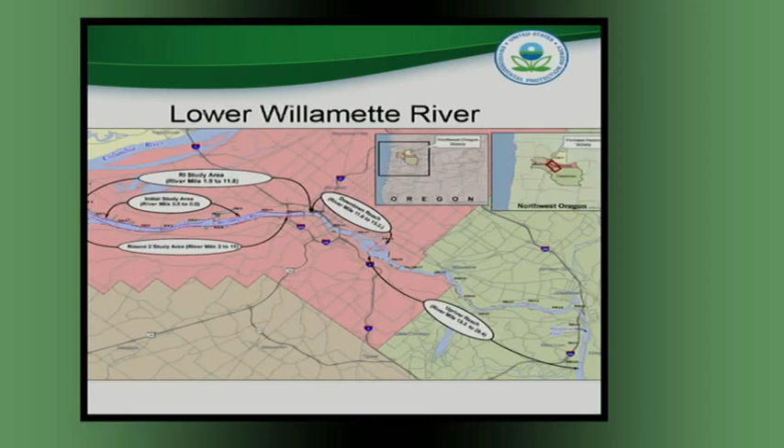Since 2000, EPA has worked with the Oregon Department of Environmental Quality, 6 federally recognized tribes, 3 natural resource trustees, and the Lower Willamette Group, a group of 10 potentially responsible parties for the cleanup. We have done extensive studies of the amount of contamination in the Willamette, how people and the ecosystem could be harmed by the contamination, and options for cleaning up the contamination. We have sought public input throughout this process.

This map up here shows the lower reach of the Willamette River. It is about 26 miles long. The confluence is at the Columbia. When we first listed the site, it was listed from river mile 3.5 to 9.2. As we progressed through the studies, the site has grown from river mile 1.9 to 11.8.

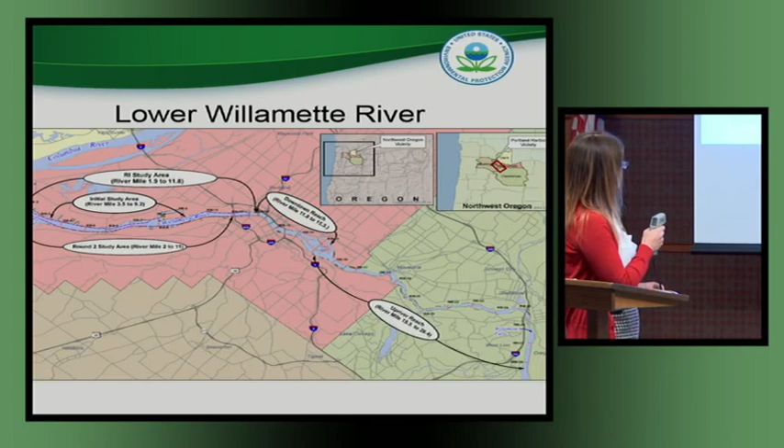Up above the site is called the downtown reach. That's river mile 11.8 to 15.3. This is an area where there are contamination and sources, and Oregon Department of Environmental Quality is working on cleaning up that reach of the river. Above that is what we call the upriver reach, and this is where we have collected background or reference data for the site, since it is an area that is not impacted by contamination from the site.

So this cleanup proposal is one part of a three-part process. We have already started cleaning up some of the most contaminated areas within Portland Harbor. We call them early action areas. Some of the areas that have been cleaned up include Gasco, Terminal 4, and the state did an oversight cleanup of Arco BP. We also have a Superfund site within our site, which is McCormick and Baxter, and that has a final remedy.

Source control is an important aspect of the cleanup to reduce risk and prevent recontamination. Oregon Department of Environmental Quality has been in charge of a comprehensive source control program. A plan that discusses the status of source control can be found on DEQ's website. I'm here to talk about the third part, cleanup of the contamination in the river. Cleanup of contaminated sediment in riverbanks, along with controlling sources of contamination, will indirectly address contamination in other media, such as surface water, pore water, and biota.

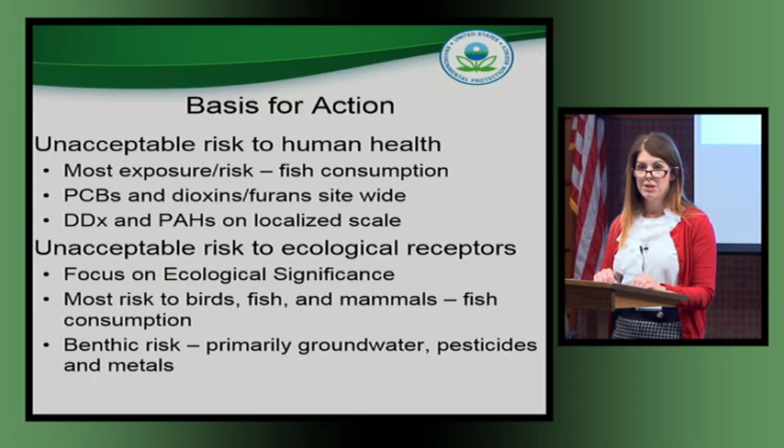The goal of Superfund is to clean up contaminant concentrations to reduce risk to acceptable levels. This does not mean cleaning up all the contamination released into the environment. There are 64 contaminants of concern at this site. Some of the contaminants are unique to certain media. Media includes sediment in riverbanks, biota, surface water, and pore water or groundwater.

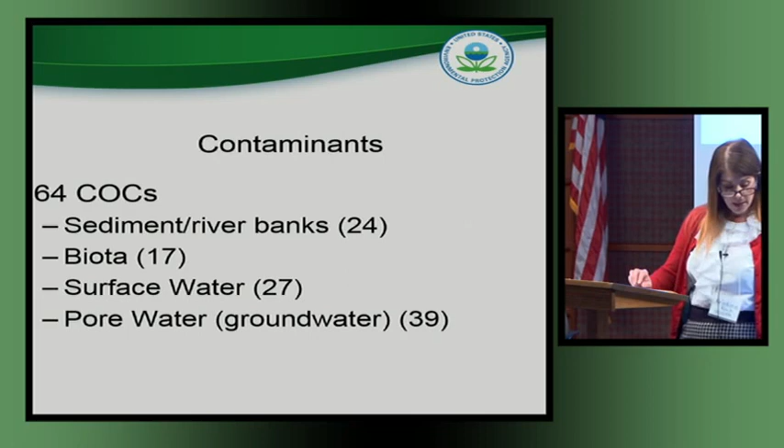Some of these contaminants, however, are found in all of the media. Not all of the contaminants are co-located. Some are found in one part of the site and others found in another part of the site. They were released from different sources, and where we see high concentrations of contamination in the sediment, we also find high concentrations in other media. So again, we're going to be talking about the 24 contaminants that are found in sediment and riverbanks.

So it's difficult to develop and design cleanup options when you have 64 contaminants. So in order to simplify this approach, what we've done is determined some focus COCs that we can use that address all the contaminants. So we're still going to clean up all the contaminants, but in order to develop these cleanup options, we focused in on contaminants that had the largest footprint, addressed most of the risk, and were co-located with these other contaminants.

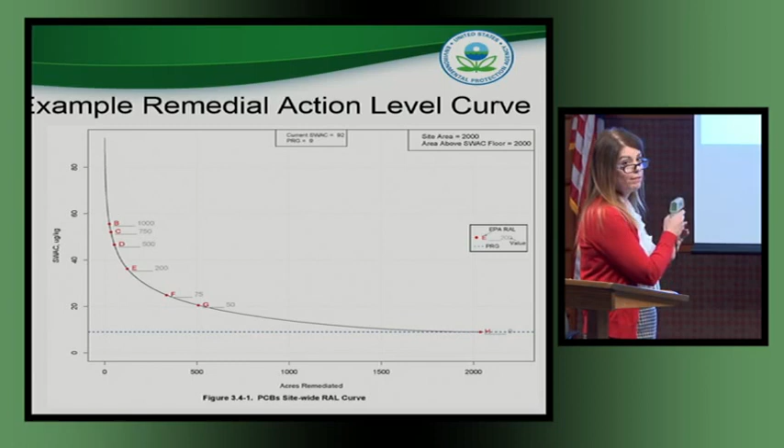So once the focus COCs were identified, we used what's called remedial action curves to determine where to dredge and cap in the river. This is an example of a remedial action curve. It is one of many tools that can be used to develop cleanup areas. A curve was created for each of the focus COCs. This is just one of them for PCBs. So the top of the curve up here shows the current level of contamination in the river. How the curve is created is by removing one sample at a time and replacing it with your PRG. And as you do that, it creates this curve.

So when you look at what contamination do I need to get to, this shows where we start with B. And you can see that very few acres are associated with B, but you get a lot of concentration reduction just by going to that point. And as you move down, the area across here increases with each one, and the concentration in the site drops until you get to about this point, alternative E. So that's where we start to get more area involved with less drop in the concentration. And especially when you get out into this far end of the curve, you'll see you have to do a lot to get a very little difference in the concentration. And alternative H is on the line where the PRG intersects the remedial action curve.

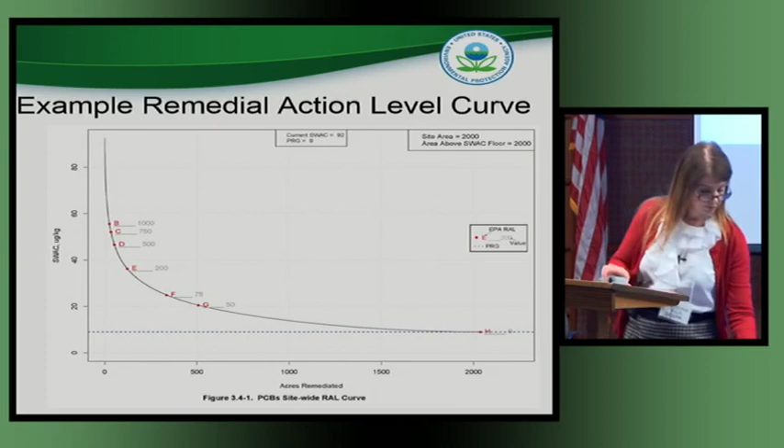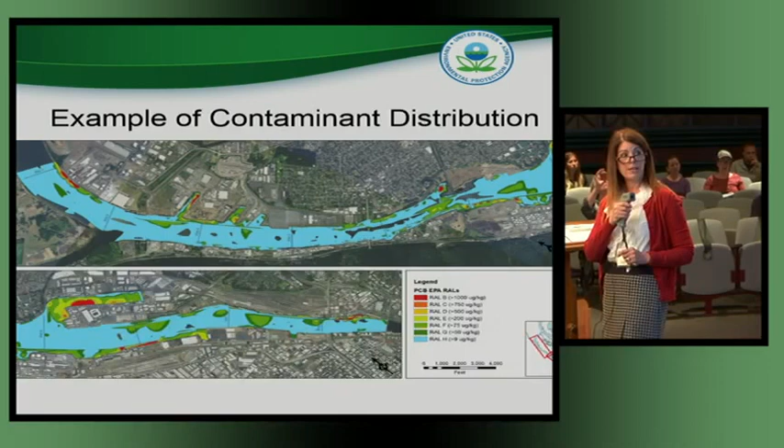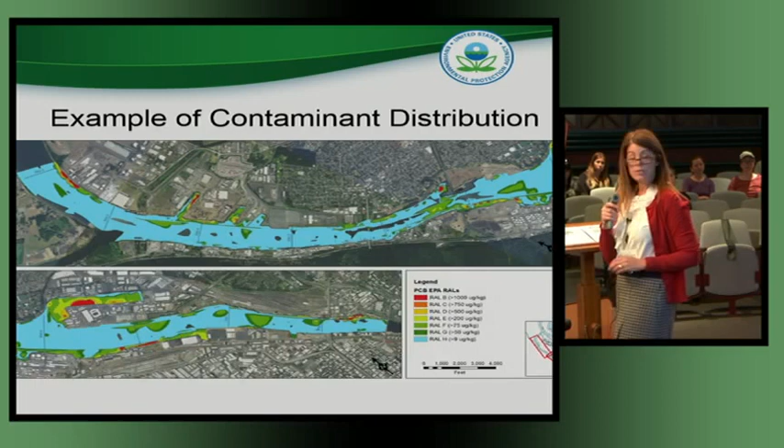Sorry, Christine. That's okay. And this figure shows then how that translates into the map of where it's located in the site. So this shows the B RAL, which is in red, so you can see the red areas of the site. And C would include the red and the orange. So that footprint includes both, and as you go down, you keep including all the ones above it to see how big that footprint is. And then, of course, the H includes pretty much the entire site. There are a few areas where it is not located.

Once an area has been dredged, a layer of sand will be placed over that area to deal with any residual contamination that remains. Options to deal with dredged material after removal include treatment and disposal in either an on-site disposal facility or an off-site disposal facility.

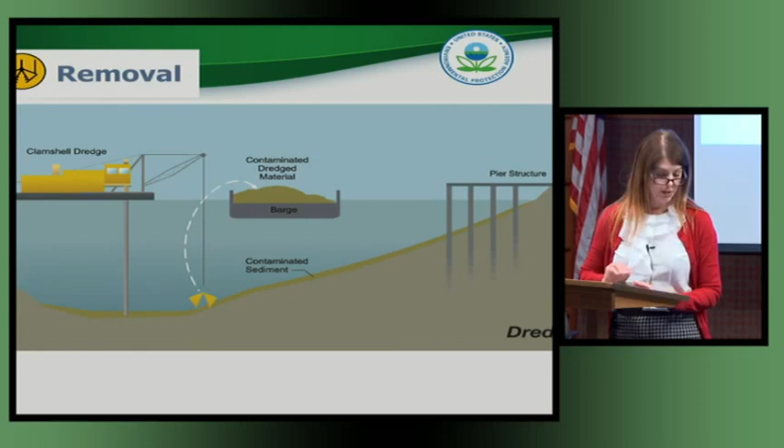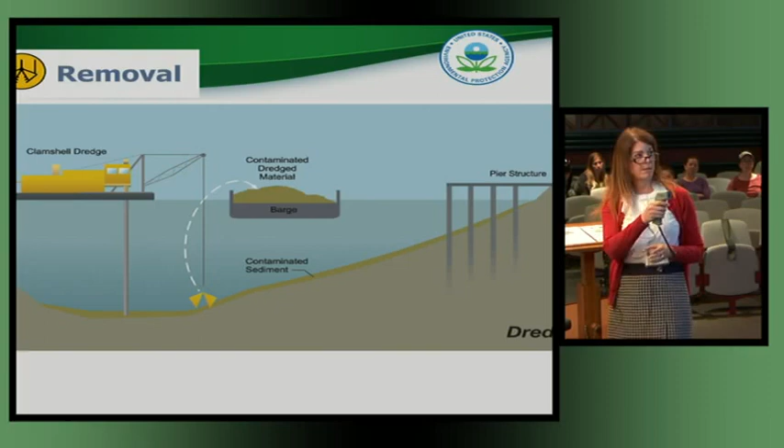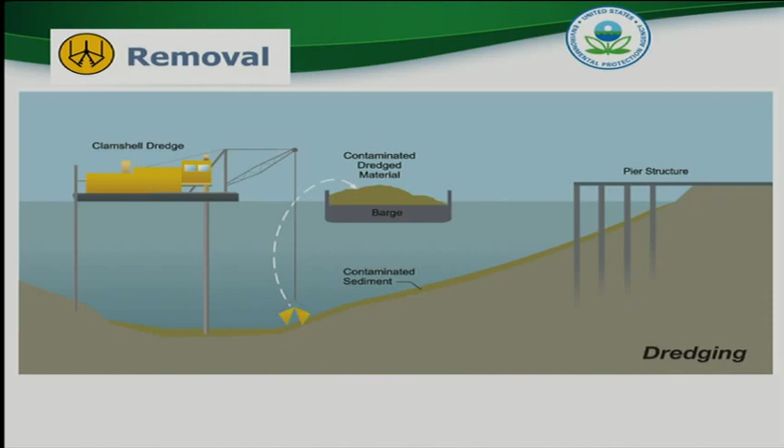So what happens here is that you have a dredge, which is on a barge, and it has a clamshell that comes down, and the clamshell clamps shut over the contaminated sediment, and then it brings it up through the water column and puts it onto a barge. And then from the barge, it is taken to a transloading facility where it's then loaded onto trucks and transported to a landfill.

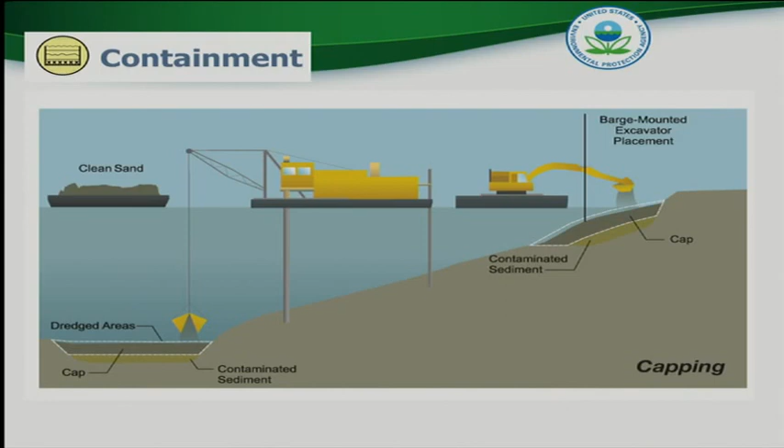Another option for cleanup is called containment or capping, and that's where we cover the contaminated sediment with clean material. This typically includes layers of sand, gravel, and rock designed to contain and isolate the contamination. Where this happens, these areas are then designated as a cap, and we have to maintain those caps as long as the contamination remains in the sediment. So that's pretty much beyond our lifetimes and into the future.

With this one, we enhance natural recovery by putting a thin layer of sand over the contamination and then allow that sand to mix and dilute the sediment contamination in the river. In situ treatment was also used as either a component of capping or enhanced natural recovery, or in the residual management layers after dredging.

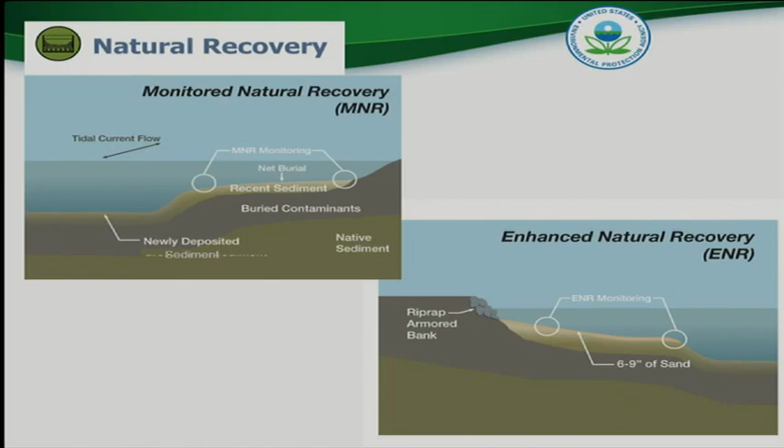So all the alternatives include varying combinations of all these technologies. Some of the things that we thought about in assigning technologies to a particular area include the type, amount, and depth of contamination, the likelihood that people, wildlife, or fish come into contact with the contamination, the potential for natural recovery or scour to occur, the likelihood that it might be disturbed by fish, ships, or construction activities, and the need to maintain water depths and habitats so that people and fish can continue to use the waterway.

Institutional controls are also a part of all the alternatives. They are primarily used to protect humans from exposure to contamination, since birds, fish, and wildlife don't read signs or obey restricted areas. For the whole river, we would have a consumption fish advisory until we meet the cleanup goals. And in capped areas, we would have regulated navigation areas and land use restriction areas to ensure that those caps don't get disturbed and release the contamination back into the environment.

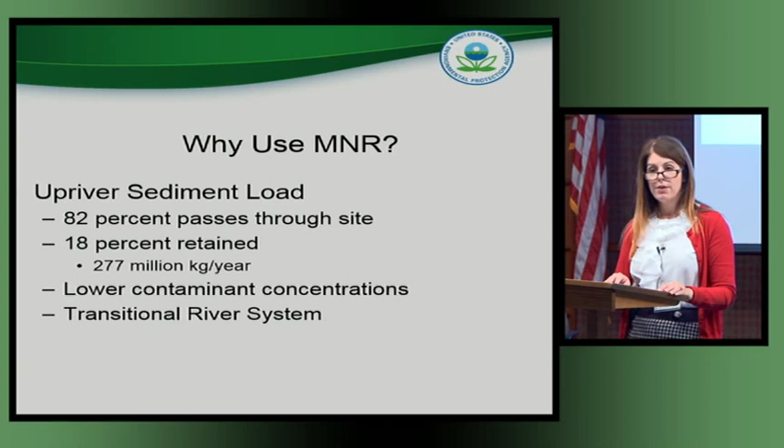So these processes are occurring now, but the data shows that they are not occurring fast enough to let the river processes occur on their own. So some action needs to be taken. So we do have evidence of MNR. We have done bathymetric surveys, multiples of them. We looked at deposition rates based on the difference between these bathymetric surveys.

We also looked at how consistent the deposition and erosion is based on those bathymetric surveys. We've looked at sediment grain size. Where we find fines, we know we have deposition, and where there's coarser material, we know it's more erosional. We look at anthropogenic factors, such as propeller wash, where we know that those activities that humans do will not allow monitored natural recovery to occur.

We also looked at surface to subsurface concentration ratios. This allows us to see where we have more mixing occurring in the upper surface layer than in the subsurface layer. We also looked at where we have wind, wave, and wake actions, because in these nearshore areas, that constant sloshing of the water is going to continue to erode away any sediment that deposits in those areas. So based on these lines of evidence, EPA has concluded that MNR is a viable cleanup technology that can be used, but it can't be used in all areas of the site, especially with higher concentration areas.

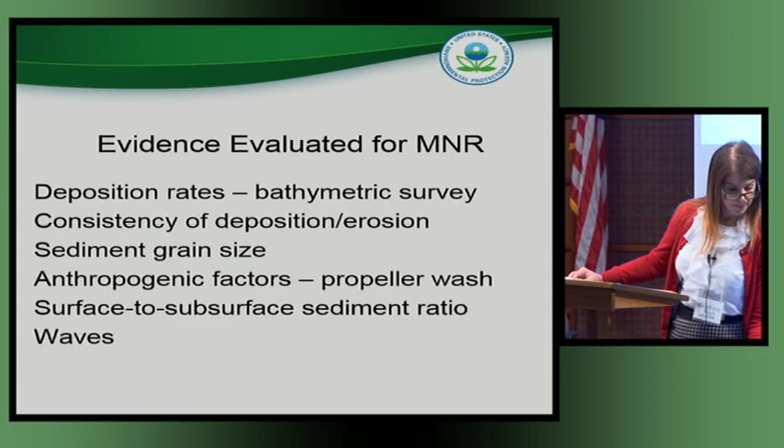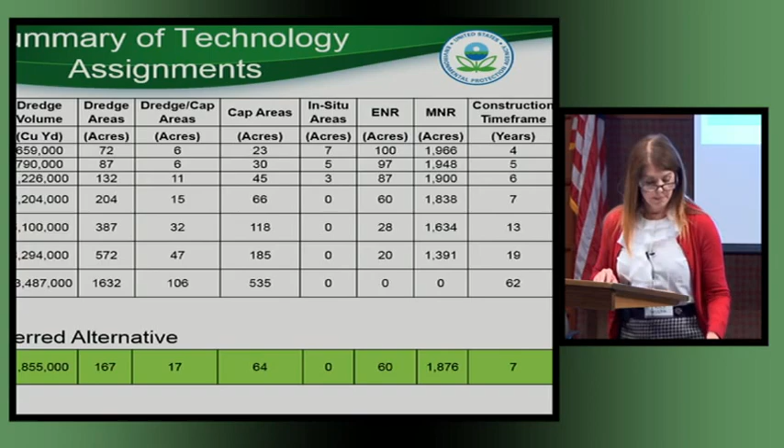So this slide shows a summary of all the alternatives evaluated in the feasibility study. As you can see, with each alternative, the areas of dredging and capping, or just capping, increase as you move through the alternatives. But the areas of pure in-situ treatment, enhanced natural recovery, or monitored natural recovery decrease. Also, the time frame for construction increases and the cost increases.

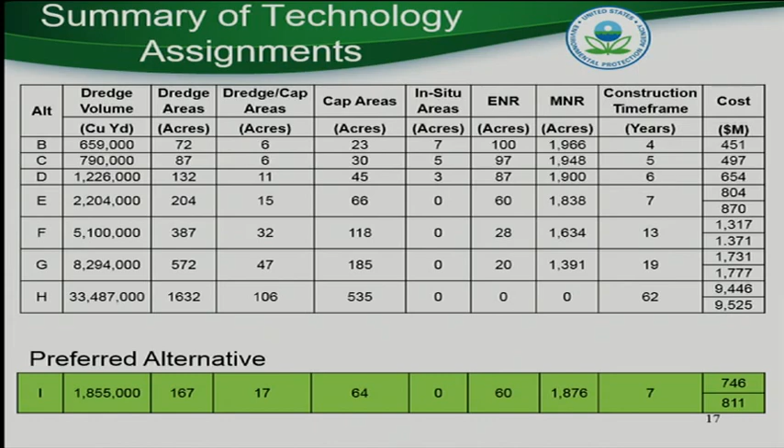So the preferred alternative for EPA is Alternative I. It was developed from Alternative E and has been modified in some areas to reduce the construction impacts while maintaining consistent risk reduction. This is why Alternatives E and I perform very similarly in the evaluation of the alternatives. Balancing impacts of construction to community and environment with cost and duration of construction were considerations in developing Alternative I. These are some of the areas that were modified from Alternative E to develop Alternative I.

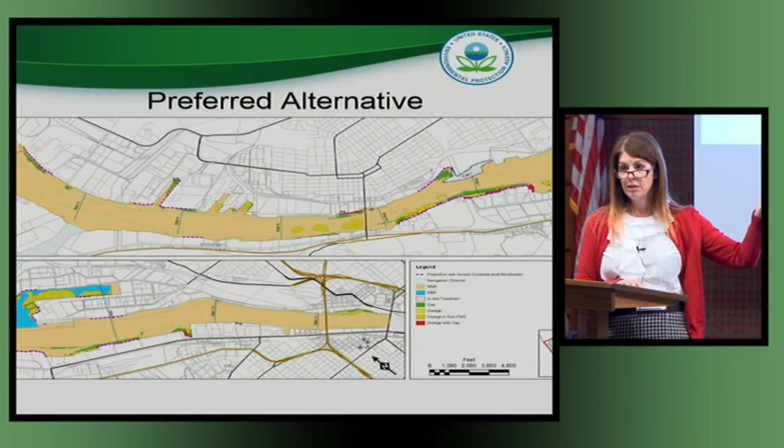This is a map of where each technology is used in the river. This map was developed based on the remedial investigation data set. The footprint shown here will be further refined in remedial design. Also, this map is shown on this wall over here, so if anybody wants to go take a look at it after the presentation, you're welcome to.

This figure also shows the breakdown of the different technologies used for the site. So this pie on the left shows the breakdown between monitored natural recovery and sediment management areas where we're going to be dredging and capping. This is the McCormick and Baxter cap, which is a final action, so we're not going to take any action in that area. And then this other piece, 3%, is enhanced monitored natural recovery.

So what we have found is that taking action, capping and dredging in this 11% of the site, translates into addressing 85% of the risk at the site. And so what we're going to do is allow 88% of the site through MNR and EMNR to deal with the last 15% of the risk.

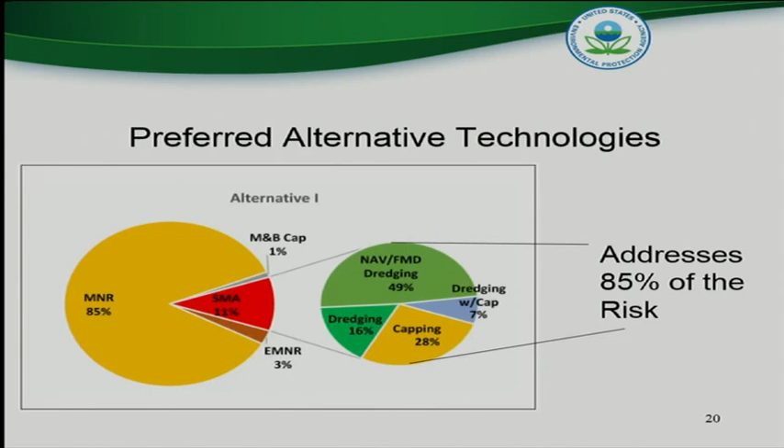So EPA's regulations dictate the criteria we use. Any plan we choose must meet the first two criteria: protect human health and the environment, and comply with federal and state environmental laws. Then we use the 5 balancing criteria to weigh the relative pros and cons of the alternatives. The last 2 criteria are generally considered after the public comment period, but we considered these 2 in coming up with the preferred alternative using extensive feedback received to date.

So alternatives have different features and effects. For example, alternatives with more natural recovery have lower cost, lower impacts from construction, but higher uncertainty because we're relying on what may happen in the future with monitored natural recovery. Alternatives with more dredging have higher cost and higher impacts due to construction and are more certain and permanent in the long term. This is just a snapshot of how the alternatives were evaluated in the feasibility study.

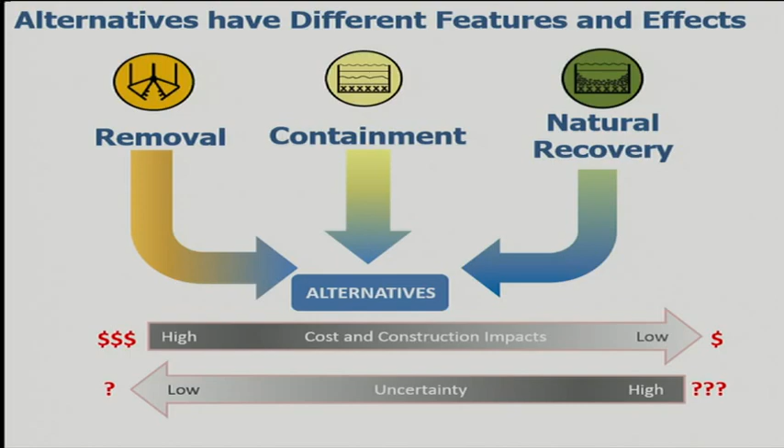So please, we're here to hear what you think about this. We have many forums for you to provide your comments. All the documents that support this cleanup plan are found on EPA's website. You can comment through email, by sending comments in the mail, or using our electronic comment box on our website, or orally at any of EPA's public meetings, but not in this room.

Thanks, Christine. And now we're going to start our question and answer session. And I'd like to invite the EPA team to come up. Here we go. And Julie is going to be manning the microphone, or personing the microphone. And if people have questions, if you could just raise your hand. And if anyone's in the overflow room, I don't know if anyone's watching from the overflow room, but you'd like to come in here and ask your question. So we'll start. Julie? And please be sure to talk into the microphone because otherwise it doesn't get recorded.